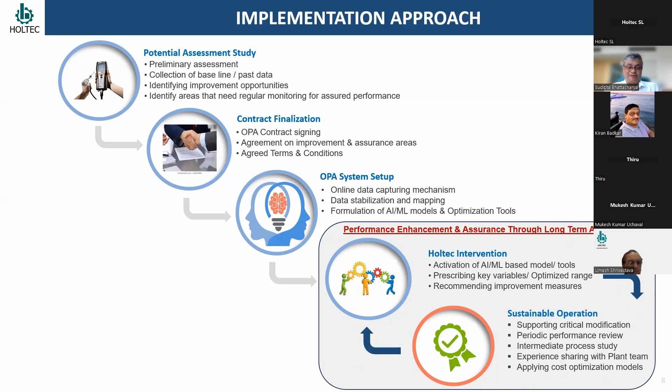So these performance enhancement services, as you can see in the block, it's an association, I will say, rather it's a journey. A journey of collaboration between the plant and Holtec, which comes in the longer run and enables the system to improve over a period of time and sustain for a longer period.

Now let's talk about applications of artificial intelligence and machine learning for performance enhancement, how this works. We start with, first, digital twins. This is one of the key criteria of virtualization of Industry 4.0. I hope you all have heard about this.

Digital twins means we create a replica of your plant. This replica is visible here as well as at the client's end through our reporting platform. I'll go into details in the later slides. You can see one pyro processing screen, one cooler screen, one calciner operating screen, as well as one grinding screen.

So normally as a first step, we create a digital twin to understand the key variables, how these variables change over a period of time, and what story basically comes out during the operation process that we start analyzing.

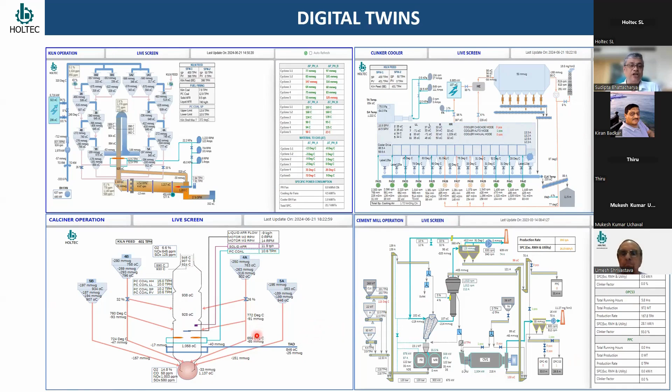So this is basically data analytics. This is, I will say, the backbone of all our analysis which is being carried forward.

Now there's a bigger slide of this preheater and the kiln area. You can see the plant live data which has come from the plant. Based on this, some of the key analytics which we try to analyze over a period of time, which online running gives you the differential pressures across all the cyclones, the differential temperature gradients across the cyclones, as well as difference in temperature and material, gas and material.

So these are all dynamic. They started moving, sometimes crossing the ranges or coming within the ranges. But all this speaks about a pattern in the data, which is very important to understand how the plant behaves. Once we capture this pattern, our algorithm starts building the blocks in the backdrop.

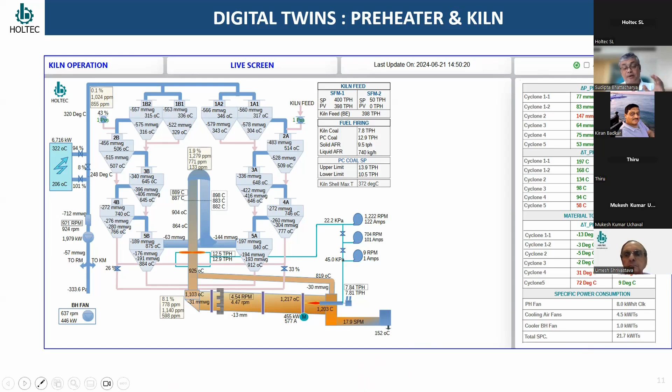So we started going into this prediction and forecasting models. I will discuss this in detail in later slides. This is basically the building blocks of developing our algorithms and the blocks.

Now, one more analytics dashboard. These dashboards are very important to give information to the plant operation team and various departments involved in day-to-day operations, so they get a very clear sense of how the plant is operated, though not being inside the CCR every time. From various machines you can access this data and see how things are improving or operating over a period of time.

So the changes in the pattern give us an idea how the plant is being operated with respect to some optimized ranges. This is basically the benchmark we create based on the data flow and how the plant is being operated.

Those things are correlated with the differential pressure to understand how and why things are changing, and what could be a stable or optimized zone, or the reasons which you can identify to make operations much more stable.

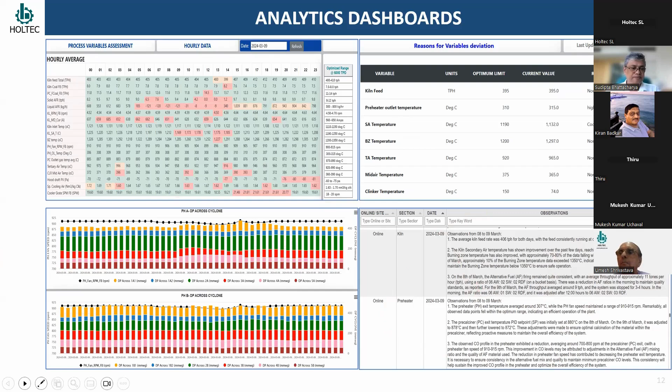As I said, the process variable range is a little bit elaborated in detail. You can see some areas are red, some are yellow, some are green. At a glance we can see how the variables are changing, how they are deviating from their optimized range, and what further needs to be done.

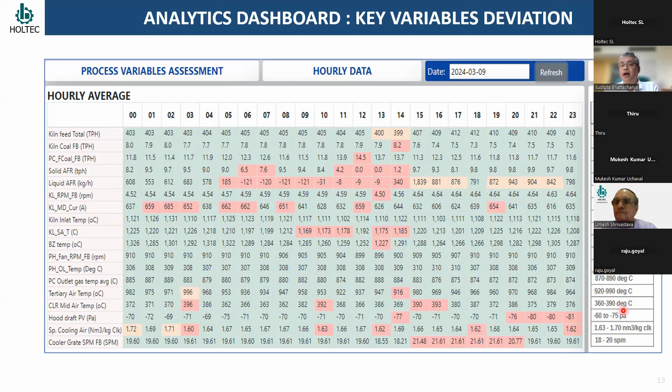Our process deviation page, the variable deviation page, will further guide you to understand the deviations and further actions that need to be taken.

So a better correlation can be seen and monitored and tracked on a regular basis. Operation review, bearing temperature and vibration monitoring, all these dashboards are readily available. You can see the operation, how the things are moving.

Now interventions, as I said, Holtec interventions are regularly being done with the client and shared with the plant operation and maintenance team. Along with this, we share our recommendations as well. So there is a constant communication going on between the plant team and the Holtec team. So whatever we are observing sitting here far away from the plant, we can share our insights through this platform on a regular basis.

We have different collaboration models like our meetings, our communications, and plant reports. Whatever study we're doing, desk-based or on the site, everything is documented and well available on the platform.

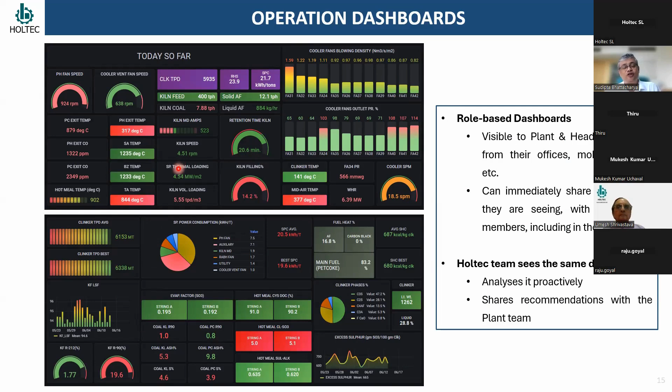These are very specific, and you can see this will be helpful for the process and production team to understand - not being in the CCR, but outside the CCR even, anywhere sitting across the globe, you can see the major key variables which are readily available and assimilated on a single web page. So this gives a very clear idea how the variables are behaving, how the variables are trending, and what is the relation between the process variable and the quality parameters.

A little bit below, quality variables are also shown in the chart dashboard. So you can see there is a constant hand-to-hand communication going on between the process and the quality parameters. This is very important to understand how the process is behaving and what further needs to be done.

So all these analyses are readily available to all the plant team, so they can take proactive actions. Holtec is always sitting there to support. So this helps the plant as well as Holtec for better communication and an advanced system for improving the performance.

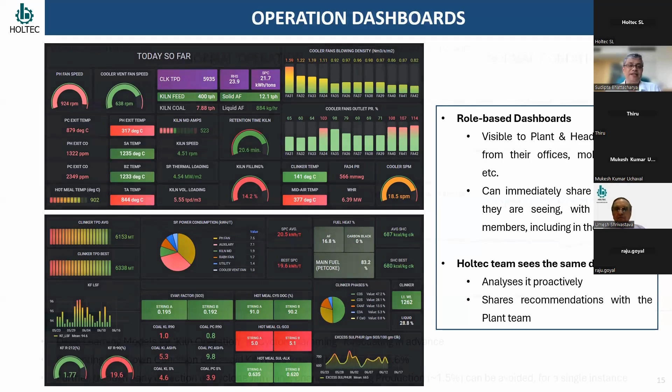So kiln torque and burning zone conditions are forecasted on a continuous basis. By seeing this, the CCR operator can have a sense in advance that the kiln condition may go down or the kiln can get hot. So when the kiln is getting hot, the people sitting in the CCR can take very prompt actions so that the range of the variables should not cross a certain limit, so that operation remains in a sustainable zone for a longer duration.

Over a period of time, we can see that by implementing these models, plant upkeep and plant sustainability can improve. If these models are followed in a longer run, we have experienced that a loss of kiln feed of around 1.6% can be saved. At the same time, if we can avoid at least one cyclone jamming in a year, at least 1.5% of the total feed loss can be avoided. So these models, if followed religiously, can give immense benefit to the plant operation team, what we perceive.

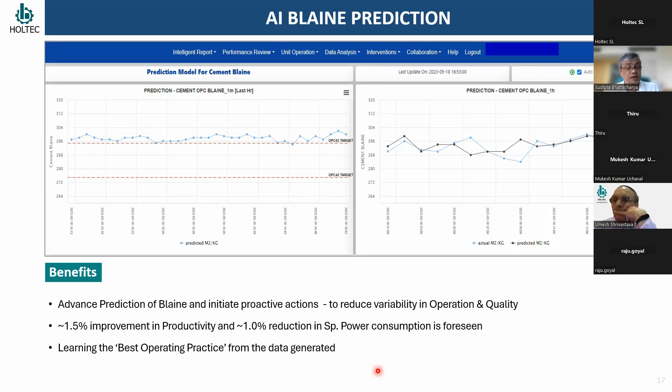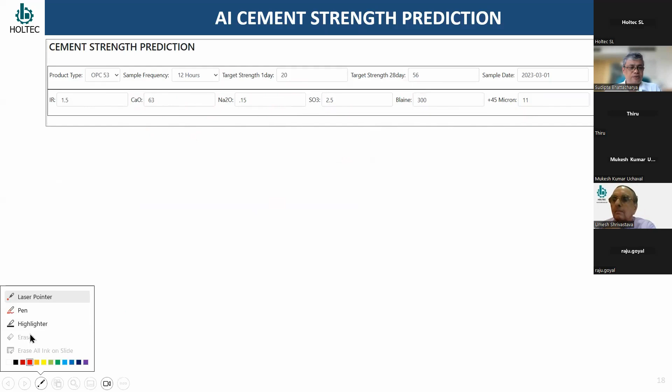The next thing is cement prediction. Here we have some key variables: sample frequency, 1 day strength, 28 day strength, and some key variables like IR lime, Na2O, SO3, Blaine target, and residue. Once we feed these values into the system and click the predict button, then based on how the operation is going, the system gives an indication that the strength at 1 day and 28 day will be somewhere with respect to your target range.

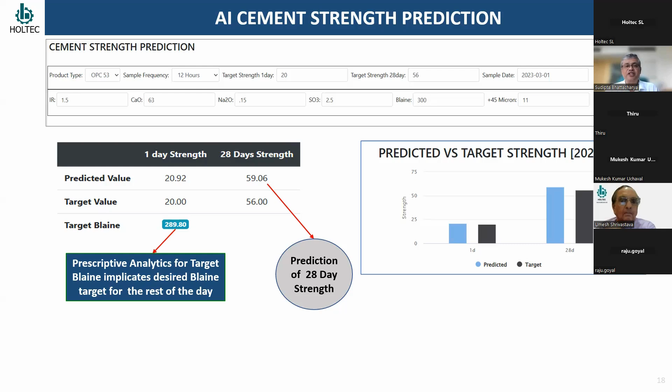From this, our AI models will start giving you prescriptive analytics to improve your Blaine target. Now, though your Blaine target is 300, by seeing the strength which is already high, and you are delivering higher quality to the market, you can reduce your product Blaine. Once you reduce your product Blaine, the strength will get matched. So you can get an idea from this prediction model how the operation is moving and what further needs to be done to improve the strength of the product.

The underlying concept of this strength model is we need not give poor quality product in the market, nor will we give higher quality product either. The closer the range setting - say my target strength is 56, if I can maintain plus minus 1, I will be the happiest person to give a more justified product to the market, where my business ethics will also get justified, and my client will also get satisfied - they will never get a lesser product. So early prediction of 1 day and 28-day strength will definitely improve the quality of the cement, and gives confidence to the team that we are not giving any lower or higher quality product to the market at any point in time.

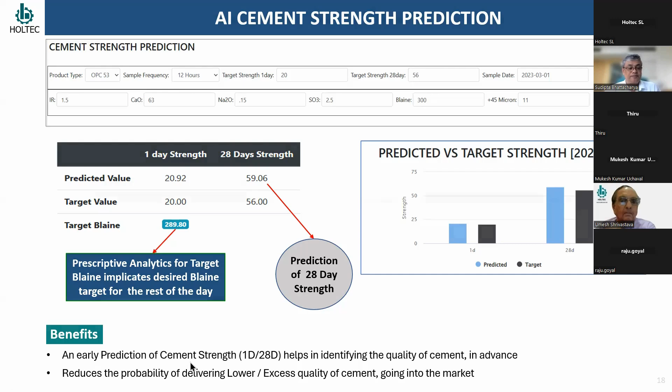Now let's quickly have some case studies, have a look at what we did so far and what our experiences are coming out from this whole process.

This is a plant where we worked on a PPC grinding project. When we started, during the initial process we found around 26.6 specific power with a 0.62 clinker factor and a throughput of 243 TPH. Based on this, we took some baseline values where we could improve the plant or take it to the upper level.

So we set some targets of 3%, 2%, and 4% improvement in the throughput. Over a period of time, through our interventions in terms of engineering and process skills, along with amalgamation of the data analytics modes, we achieved around 9% improvement in the grinding efficiency and specific power consumption.

A little bit less, but yes, without any capex or investments, the latent potential was extracted from the plant, and we were able to reduce the clinker factor by 1.45%, and throughput improved by around 2.5%. So again, the targeted throughput, though a little less, you can see in the lower table.

The initial fineness, when this project started, was 7.5, and at the latest stage, with development in the plant, the target changed to around 7.1. Once the fineness got reduced, this process led to an increase in strength also.

It's quite evident from this data that there is improvement in the process and in the quality of the product. The client gained confidence in the product quality, and then reduced the fineness of the product while increasing the strength. So in some way, they got benefit out of this whole process, clearly visible from the specific power as well as the clinker throughput.

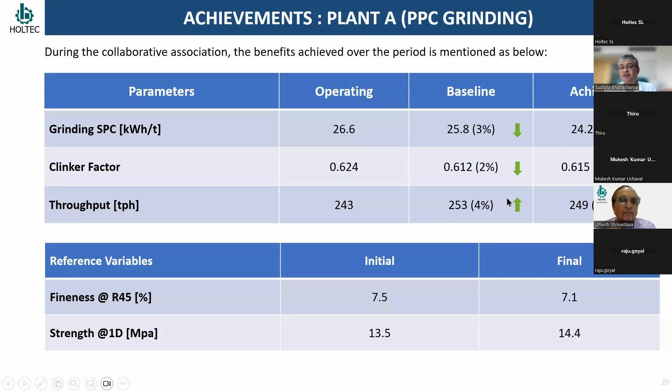One more plant in the OPC grinding you can see. When we entered the plant, there were certain parameters for OPC 53 and 43. Before our interventions there were some baseline parameters, and once we started intervening into the process through our AI-enabled approach, we were able to increase throughput by around 4.2% in OPC 53 and around 3.6% in OPC 43.

At the same time, we achieved specific energy reduction in the system over a period of time, as you can see in the waterfall graph. Over 3-4 months, we were able to achieve a 6.3% reduction in OPC 53 specific power consumption and 6.9% in OPC 43 specific power consumption.

So apparently it gives us confidence and strength that the approach we are following to improve plant performance with the help of data analytics is quite deep, and over a period of time it will emerge and definitely bring a lot of benefits to the table, which we are reasonably confident about.

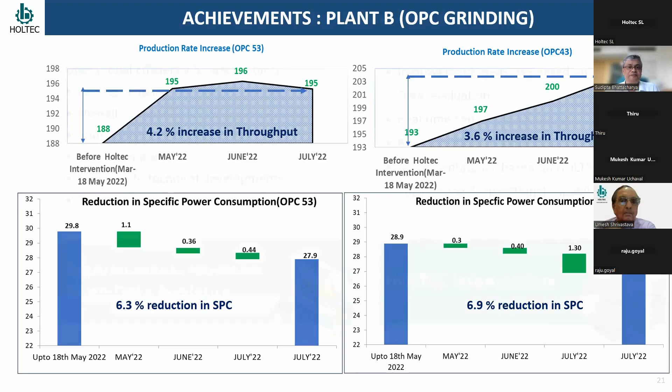So overall, talking about the benefits of our OPA and AI services, we see improvements in efficiency and sustainability, process sustainability, energy efficiency, product quality consistency, optimization of costs, exposure to technical developments, and customized applications. Each and every plant is specific, so we target fulfilling each plant's requirements in the way the plant is looking for.

Our interventions, as you can see in the right window, all our improvement measures and recommendations placed on the platform are based on online data evaluation. So we need not sit in the plant. We are far away from the plant, but still our algorithms and analytics modules give a fair amount of idea how things need to be managed and how the plant needs to be operated. Real-time consultations are always done with the plant team, so there is no hindrance.

Any point of time, the plant can call. Holtec is always there for your support. And all the implementations we recommend are risk-free.

In some areas we do non-destructive testing. Before implementing something, we do simulations at our end and test the things before advising our client to implement. So far our experience goes quite well, and whatever implementations we did all gave good results in the recent past. All implementations are based on Holtec's design, engineering, and operational capabilities.

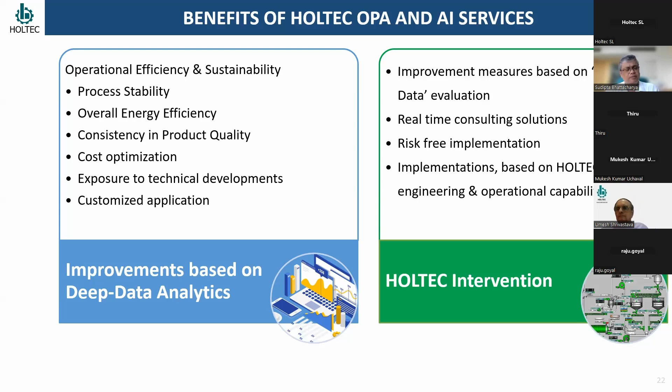Holtec has huge experience of 57 years across the globe. The database we have is very huge and the references are remarkable. Before implementing, we apply all our database support and accordingly recommend to the client that this sort of recommendation will be beneficial. Nevertheless, joint discussions happen before implementing any of the recommendations we share with the client.

Each and every system has its potential, but in most areas we have seen that the latent potential has not been extracted. So some gray areas are always visible. Once we implement our system, those areas become visible - the deviations in the variables become visible, the potential of the particular variables become visible.

So once we captured those variables and started intervening, over a period of time, what we have seen or experienced, we are sharing with you.

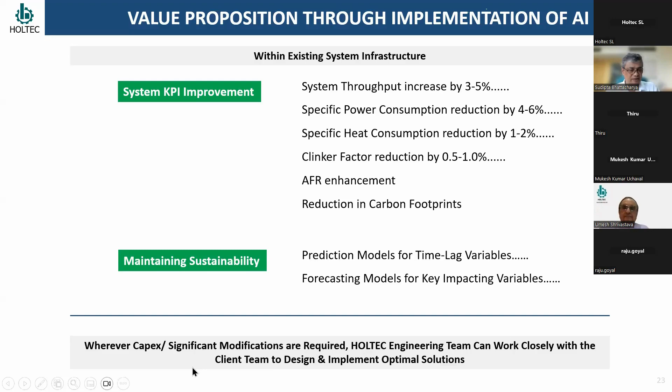You can see data captured for many past years, because normally in plant operation, data is stored for 6 months, 3 months, or maximum 1 year based on the capacity of your server. But in this case, there is no limitation of storing the data - it can be stored for a vast period.

Once the data is stored, the nature of the data is studied - the pattern of what the plant says under different conditions, with seasonal variations, and with change of operators.

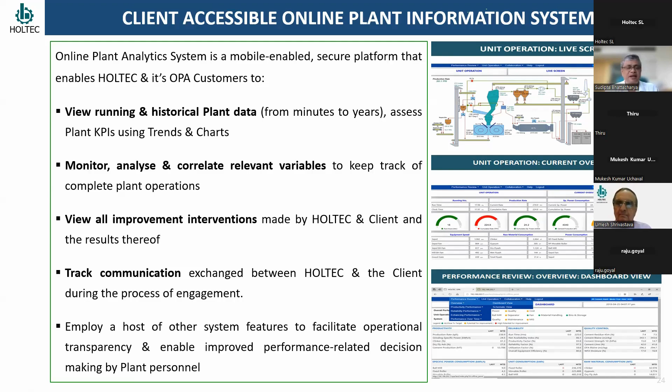So all these things are being studied in the background, and the ultimate outcome is the prediction and forecasting models, which give better insight into plant operation so that Holtec, along with the plant, can take their own actions over time. The data is monitored, analyzed, and relevant variables are tracked for analysis. All interventions made with the client are available in this platform, and all communications are tracked, so the plant can take its own decisions or consult with Holtec before implementing recommended actions.

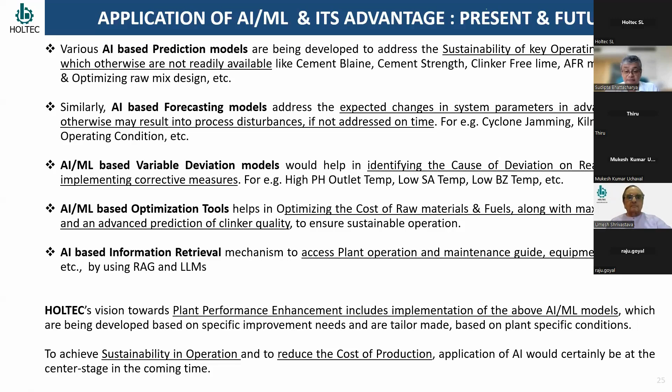Sustainability of operation and cost reduction are the prime focus of our services, and we hope that AI will take center stage in the coming time for improving plant performance. So with this, I will end this presentation.

So basically, the collaboration between client and Holtec through AI-enabled implementation of performance and assurance services can bring numerous advantages and innovations over time, as we have observed. We are quite confident this approach will help the plant gain more from these services and lift their operational performance in the coming time. So with this, I will stop this presentation.